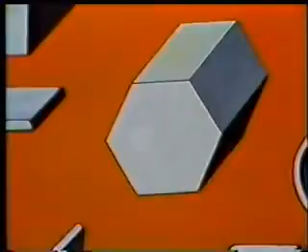We have just seen an assortment of metal items of common use. You all know metals are hard and cannot be easily formed into these products. Then one wonders how this is done. Each one of these items needs a special process of manufacture.

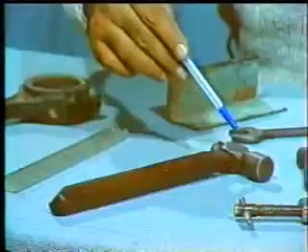And this brings us to the topic of metal forming. The topic of metal forming is quite vast in itself, but our purpose here is to understand the concept and appreciate the usefulness of these processes.

Some of the metal forming processes under the bulk deformation processes are forging, rolling, extruding, wire drawing, and others such as sheet metal working.

Now let us understand the principles underlying these processes and how they work. To start with, we will deal with the principle of forging. In the forging process, material having some malleability is worked on by compressive forces.

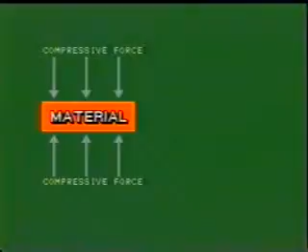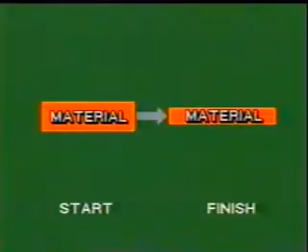The result is that material size decreases in the direction of compressive forces and spreads in a direction lateral to compressive forces. This process, when applied to production of a component, should result in a component of desired shape and size.

Forged jobs are commercially produced on forging machines. Now let us understand the process of forging by graphic animation.

The job is placed on the lower die. The lower die is clamped to the machine table. The upper die is mounted on the ram. The ram moves up and down, thereby bringing the upper die heavily on the job. This repeated striking of the job causes it to be compressed.

By this process, a variety of items of utility are prepared. These items range from rivet, bolt, spanners to connecting rod, C-clamp frame, horseshoe, hammerhead, etc.

The main advantage of forged items over cast items is their higher strength and durability. The materials which are extensively used in forged components are iron, carbon steel, alloy steel, stainless steel, copper alloy, aluminum alloy, magnesium alloy, etc.

Another important metal forming process is rolling. In this process, we will learn about its principle and items produced by this process. First of all, we will study the principle of rolling.

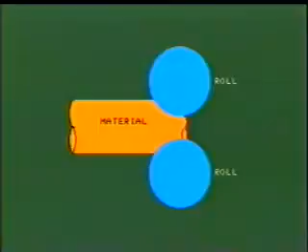In this process also, compressive forces are applied on the material having some malleability. The application of compressive forces is done through rotating rolls. The rotating rolls bite into the material and pull it in between the rolls and then pass them out.

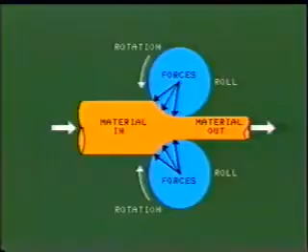This results in compression of the material in the direction of the compressive forces and spreading of the material in the lateral direction. Thus, we can say that rolling is a forging process of the continuous type. Let us see how this process takes place.

Here, material having a property of malleability is put in between rolls. The upper roll rotates anti-clockwise while the lower roll rotates clockwise and causes the material to be pulled in from the left and pushed out to the right with reduced dimensions.

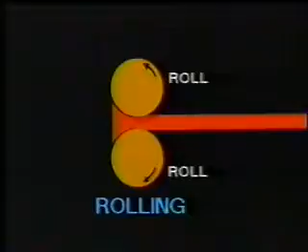We see that the speed of feeding into the rolls is lower than the speed of outflow from the rolls. Complete passing of the material in between the rolls is called a pass.

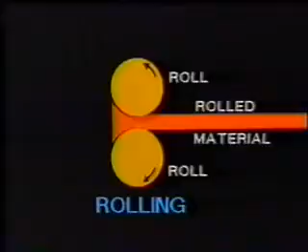A large variety of sections are produced by this process. These sections are round, square, rectangle, plate, hexagon, T, angles, and forms like channel, rail, joists, bridge rail, Z, troughing, tube, etc.

These sections find a variety of applications ranging from structural members of buildings to structural members of automobiles and aircrafts. Commonly rolled and re-rolled materials are iron, carbon steel, alloy steel, stainless steel, copper alloy, aluminum alloy, magnesium alloy.

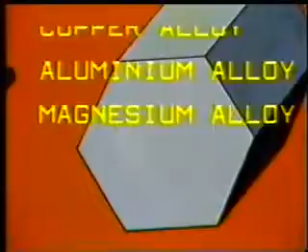Another process for producing complicated sections and structural members which cannot be produced by rolling is the process of extrusion. We will look into simple direct extrusion with emphasis on the principle of extrusion and sections produced by this method. Now let us look at the principle of extrusion.

The principle involves keeping the material in a cylinder. The material is pushed by means of a piston against a die. With the pressure force, the material is first upset to fill out the container and then emerges out through the die.

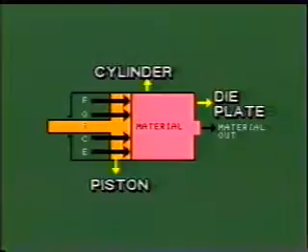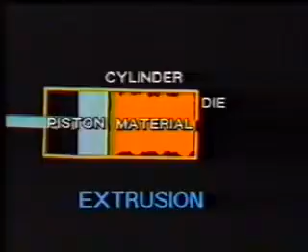Let us now see the process by which the material is extruded. The material in its plastic state is kept in the cylinder. It is then pushed by means of a piston against a die. With the pressure force, the material is first upset to fill out the container and then emerges out through the die. The process is continued till a small sized stub of material is left, while most of the material has taken the extruded form.

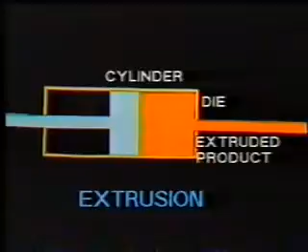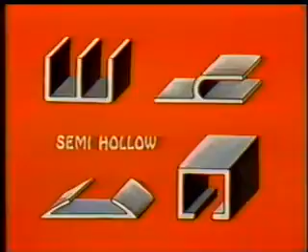Let us look at the bar sections produced by this method. These are solid, semi-hollow, and hollow.

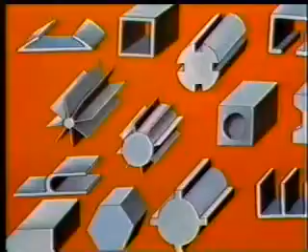The materials commonly used for extruding are aluminum alloys, magnesium alloys, copper, lead, brass, and steel.

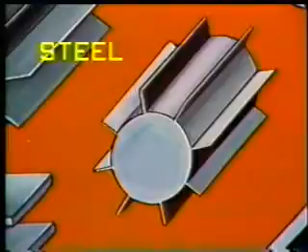Shapes extruded out by this process are classified usually according to their complexity. These are solid-shaped products, semi-hollow products, and hollow products.

Now, a question arises regarding the comparison of products produced by this method and the method of rolling. The answer is that products produced by the method of rolling are less intricate and higher in strength than the products produced by the method of extrusion.

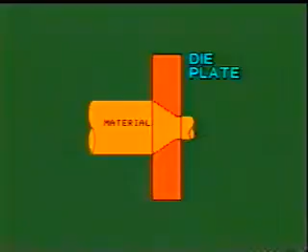Another method of metal forming is wire drawing. In this process too, attention is directed towards its principle. A rod or wire of larger diameter is pulled through a die plate. The hole in the die plate is smaller than the size of the rod or undrawn wire. Thus, when the rod is pulled through the hole in the die plate, it causes a reduction in the diameter of the rod.

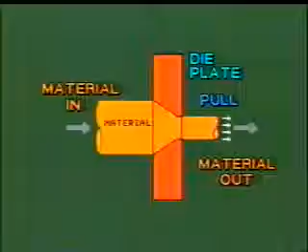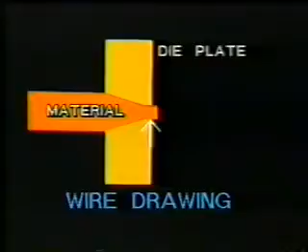Let us now see how the process of wire drawing takes place. Round wire of large diameter, when pulled through a smaller hole in the die plate, is reduced in size to a diameter as shown. By this process, wires of non-standard dimensions can also be obtained.

The wires obtained by this process have much closer tolerances and better surface finish. The process is especially useful for producing electrical wires of plain carbon steel, alloy steel, copper and alloys, aluminum, and nichrome. This completes the method of metal forming, its principle and processes.

Let us now quickly review the process of metal forming. There are 4 basic processes of metal forming. These are forging, rolling, extruding, and wire drawing.

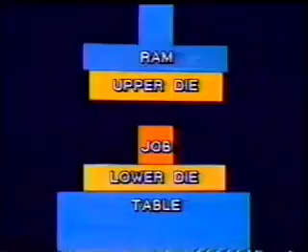Principle of forging. In the forging process, material having malleability is worked by compressive forces and a component of desired shape and size is obtained.

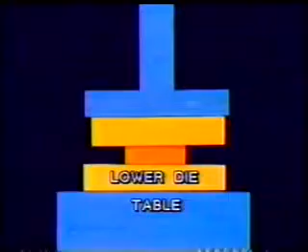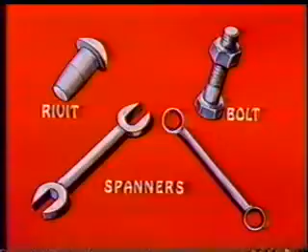Forgings have the advantage of higher strength. Items obtained by this process have no cracks or ruptures in the material. A variety of components are produced by forging processes like rivet, bolt, spanners, connecting rod, C-clamp frame, horseshoe, hammerhead, etc.

Principle of rolling. In rolling, compressive forces are applied on the metal having some plasticity by means of rotating rolls. The rotation of the rolls forms the feeding and the ejecting mechanism for the metal. It is essentially a continuous forging operation.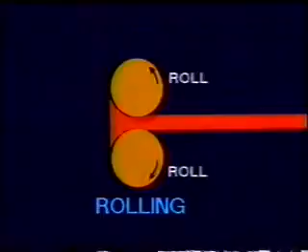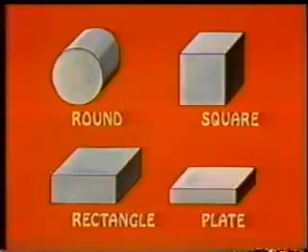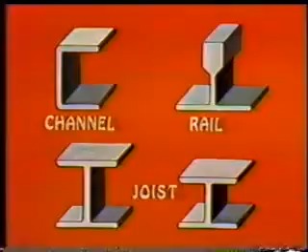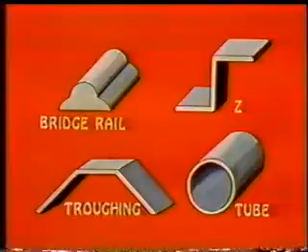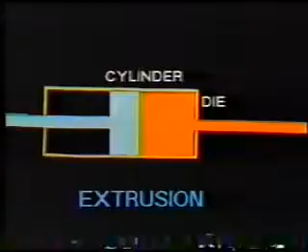Principle of extrusion. In extrusion, material in plastic state is pushed against a deforming die and bars of most complex sections are obtained. If the product emerges in the same direction as the movement of the piston, it is called direct extrusion.

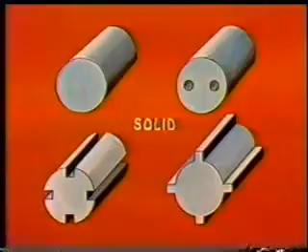The items produced by extrusion are solid, semi-hollow, and hollow.

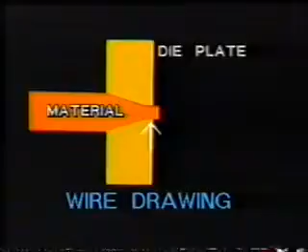Principle of wire drawing. In wire drawing, a wire of larger dimension is pulled through a die plate having a hole of smaller dimension, thereby the pulled wire is reduced. The process has the advantage of obtaining non-standard dimensions, better surface finish, and closer dimensional tolerances.

This brings us to the end of the study on simple concepts of metal forming.